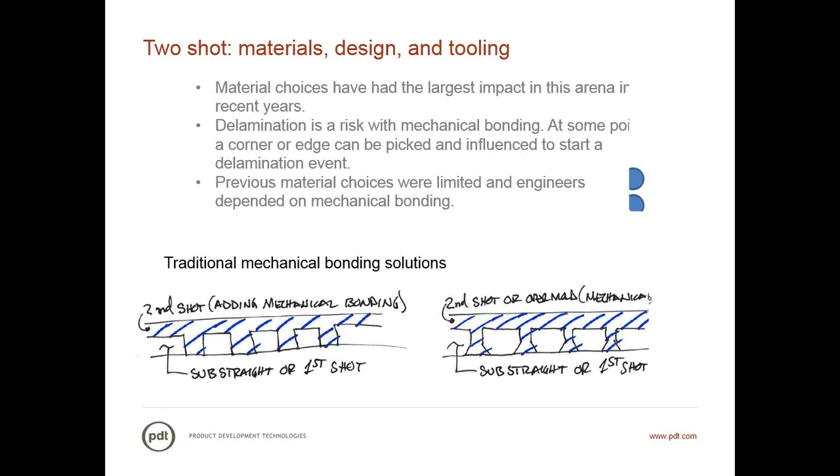So like I was saying, the material science is really the thing that has come a long way on two-shot, in most cases the substrate being rigid, and then the overmold being a soft touch or a lower durometer material. So polymer guys have been able to come up with compatibility where you have a chemical affinity layer between the first shot and the second shot, and now it allowed engineers, designers, and toolers not to depend on mechanical bonding.

And between these two materials, you get a very good bond layer at the affinity layer. So that was really a big breakthrough from the previous materials where we had things that weren't very good compatibility. So under the heat and pressure of the second shot is when this chemical affinity layer really is promoted, and you really get that in the two-shot versus an overmold. Overmold, you don't get it as much because the first shot has already been formed or cooled off, and then put in a tool, and then a second shot over it. So you get a much better bonding in the two-shot scenario in this case.

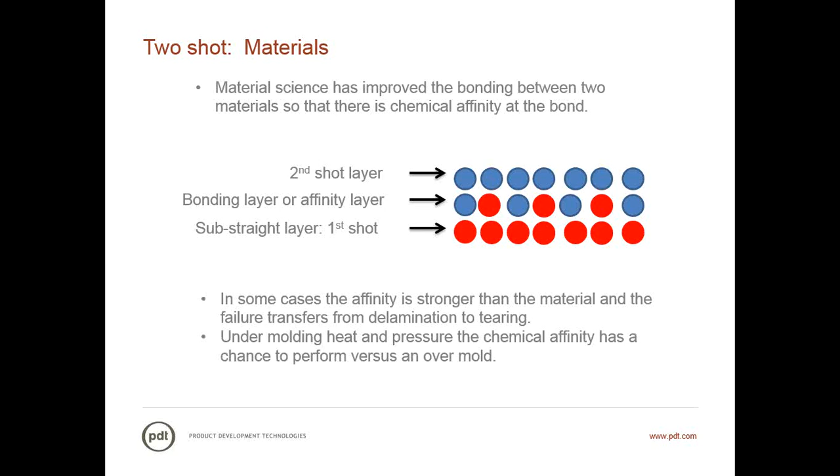You kind of want to figure out what your materials are going to be, and you have to really work with the suppliers in this case who make the materials and their experiences, and get them involved on what you're trying to do, what your requirements are, what you're trying to do from an environmental point of view. And these guys have expertise in the materials and the overmolds on what's a very good compatibility.

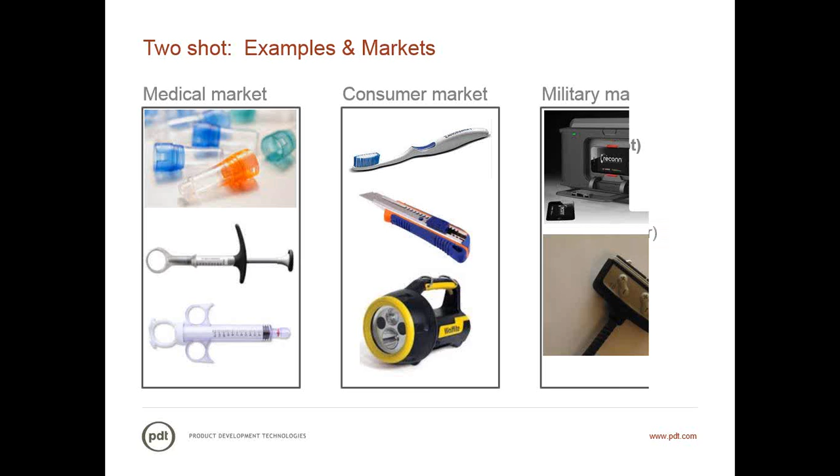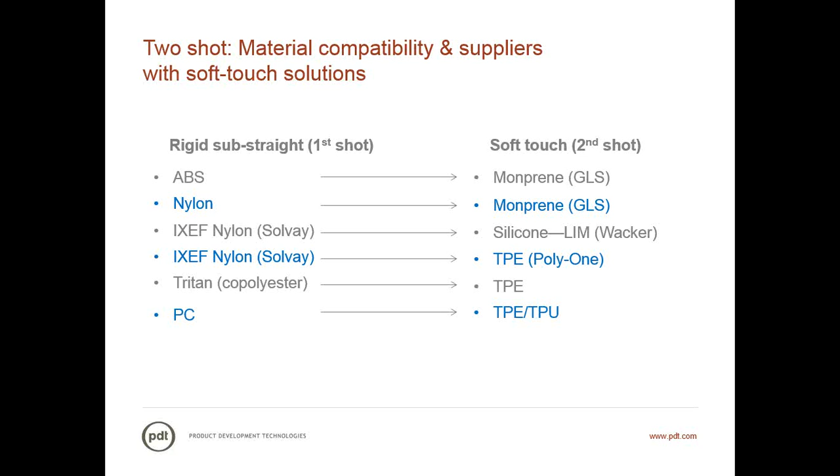So again, years ago, this was not the case where you can get second shots that were compatible with more than one chemistry. We also tried a copolyester blend and the TPE that was very good. And then traditionally, PC has been very good with TPE and TPU.

But we're seeing more and more of this in the last 10 years as tooling has become more accurate, and the materials have a tendency to flash a little less than they used to. So these are some things that you want to discuss with your industrial design team before you actually embark on what the geometry is.

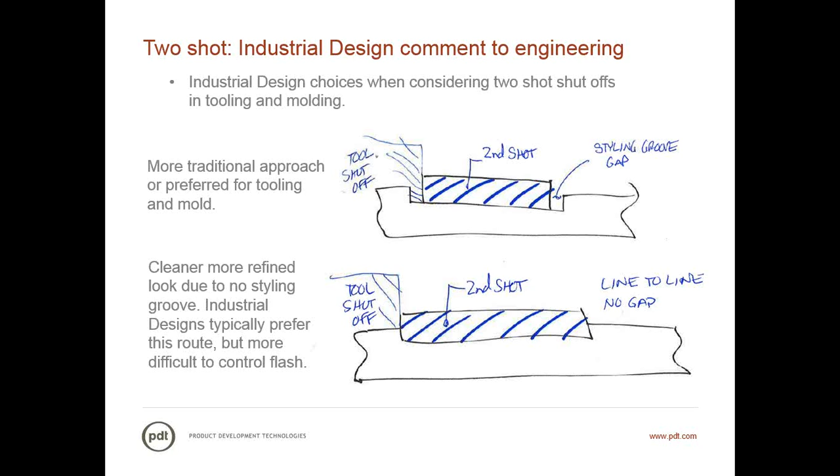The other key thing is getting suppliers involved early. The earlier the better. Preferably you get them involved as you're designing the part so that you can discuss how you're going to approach the tooling, how you're going to approach the molding. All these inputs involve industrial design and engineering and how to design around that. So everybody's going to benefit from involving the tooling and mold house or supplier up front for the two-shot program.

The industrial design guys really want to know their limits on shutoffs, parting lines, and how the appearances will be influenced by these constraints and guidelines. Then the engineers need to work out the gating, ejector pins, the first shot substrate, and the second shot. There's a lot going on there that integrates with the design and also how the molding and the tooling will be approached.

So engineers need to consider wall thicknesses, side actions, and solutions for internal undercuts. Again, it's just another reason that you really want early supplier involvement. Also, you have to worry about cycle times between the first shot and second shot, as this will have a direct cost on your part and quality.

We want to discuss if this is going to be a vertical or a horizontal shuttle. There are both solutions out there. Some companies specialize in one over the other. You just want to be familiar with what they have their setup for and what the reason is.

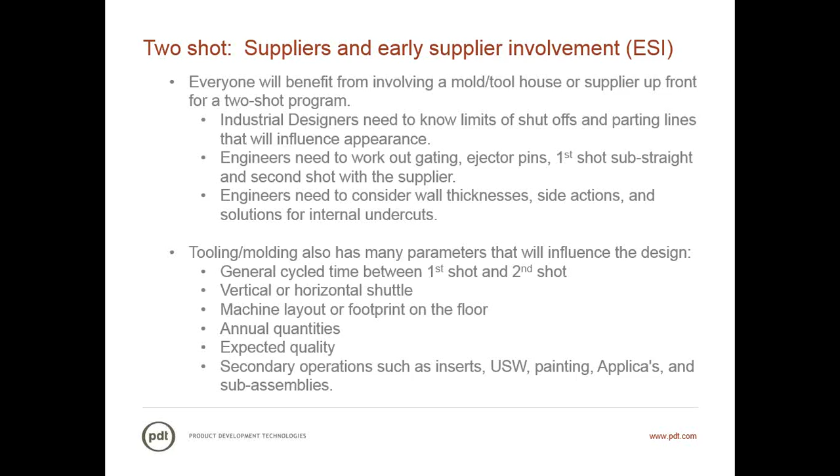So some of those lessons learned over the years: the thinner the second shot, and considering that second shot being soft touch, the more difficult it is to achieve an acceptable cosmetic. It's very difficult to get these things to not flash on thin substrates and to get enough flow where there's no cosmetic ripping at the cavity surface. So you really want it thicker, and today's name of the game is everything is going thinner with less material. So there's a catch-22 there if you go too thin.

The general rule of thumb is to have a polished surface wherever the second shot is going to be touching. We found in some cases that a soft EDM finish or slight texture does improve the bond, but most people still stick to the general rule of having a polished surface. Once you have a polished surface, you could always go to a textured surface and try out that bond improvement. But it's really a case-by-case situation.

Also, avoid any bosses or ribs that transition between the substrate and the second shot boundary. If there's a sink mark there at the substrate, the second shot just follows it, and you get a sink mark in the second shot. So you really want a uniform wall thickness with no drastic geometry changes between the two shots.

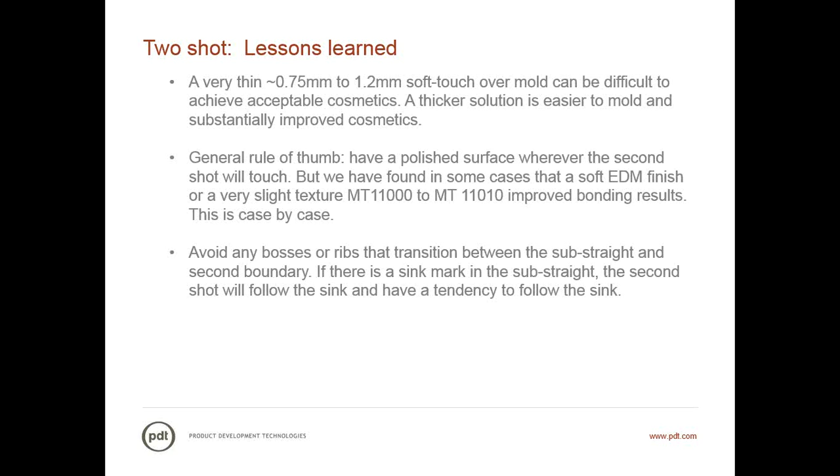Continuing on lessons learned, you want to research the shrink rates as well. Have something that's fairly close. It doesn't have to be right on the money, but it shouldn't be 10x off, which in some cases they can be. So make sure you're looking at shrink rates that make sense for the two parts. Again, that's another thing to work on with the material suppliers.

The other thing is two-shot and overmold products are more difficult to recycle. We ran into this in Europe, where they're a lot more advanced in recycling plastics than we are, and you don't see two-shot and overmold opportunities as much in Europe because of this. So it's another thing to consider if you're designing something for North America versus North America and Europe. Just something to be aware of.

And then be prepared to make a few tooling modifications, especially for the second shot, as flash is really common with soft touch materials. The material flows like water in some cases, so it's a lot more difficult to control the flash. So that concludes the information we have here from Steve.